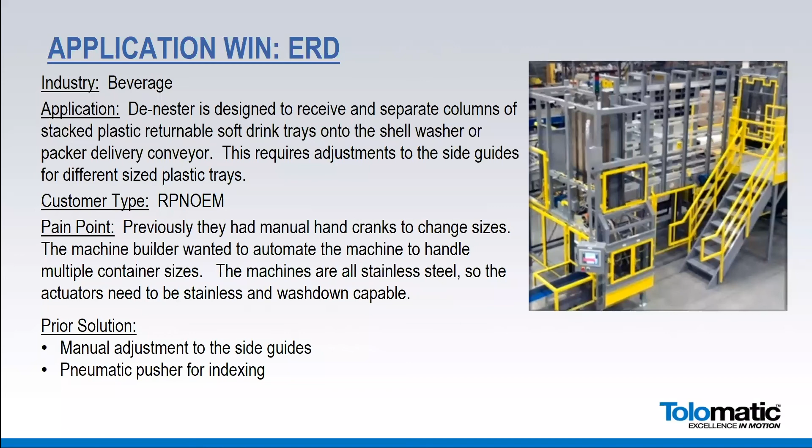There were 8 of these on the initial sale here. So we'd quoted the technology, we shipped the product. When we shipped the product with our ACS drive, they had some programming issues initially. So to help them out, we flew one of our electrical programming engineers down, got the programming right. And since then, we have gotten over $100,000 worth of orders from these guys.

But what I will say is these guys also make conveyors. So from a stainless steel ERD SS2 option, you can also use these actuators on kickoffs, conveyor kickoffs, and level 1, level 2 raising and lowering of conveyors. So we've done multiple applications for these guys, but this was a big win for us, and we continue to do business with them upwards of $100,000 a year.

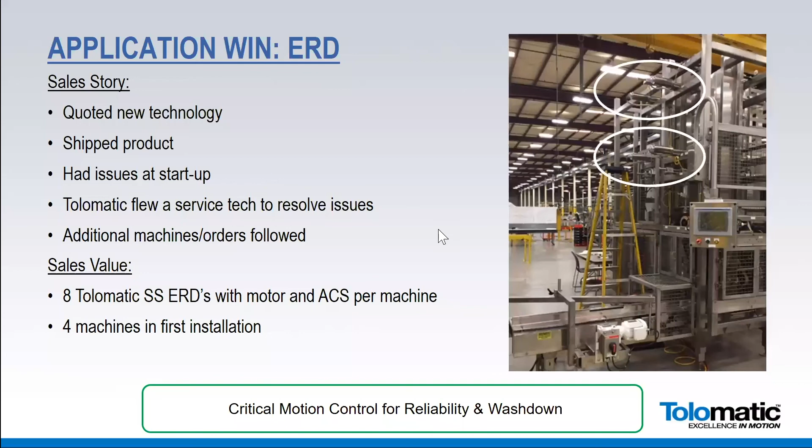So for this application, it's a simple application. As Andy mentioned, we make what we call our SRG, or Slide Rite gearbox. It's a right angle gearbox, been in production for a long time. We are probably the low cost supplier of such a gearbox, and it's used extensively in food and beverage. Fillers, denesters, as Mr. Staines just mentioned, and in this case, a field berry processing table.

All these are doing, I'll show you a picture on the next slide when we get there, is adjusting the height of the table because different workers need different heights.

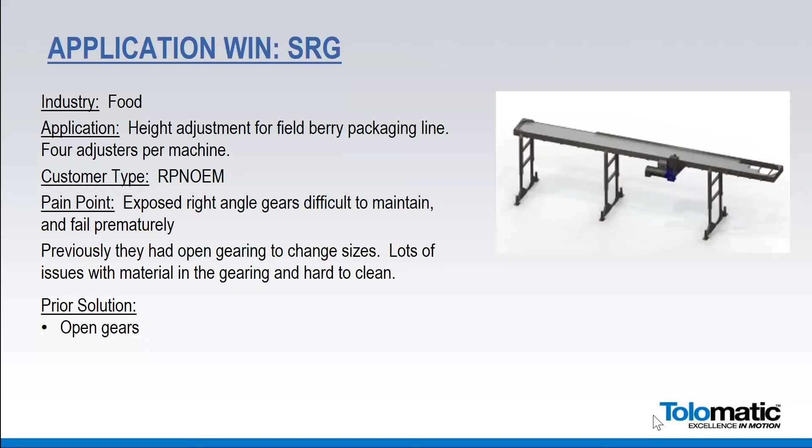Ergonomically, you want to have it in an optimal position. Most berries, like blueberries and everything, are hand-picked. So the berries get put on this line, then put in a big hopper and taken into the processing point. In the past, they just had exposed gearing, and these SRGs are way down at the bottom near the feet, dragged through the mud. We have a corrosion-resistant SRG, which is perfect for this.

Easy sale. So for you food and bev coverage customers, don't forget about the SRG. It's a really easy sell for these customers.

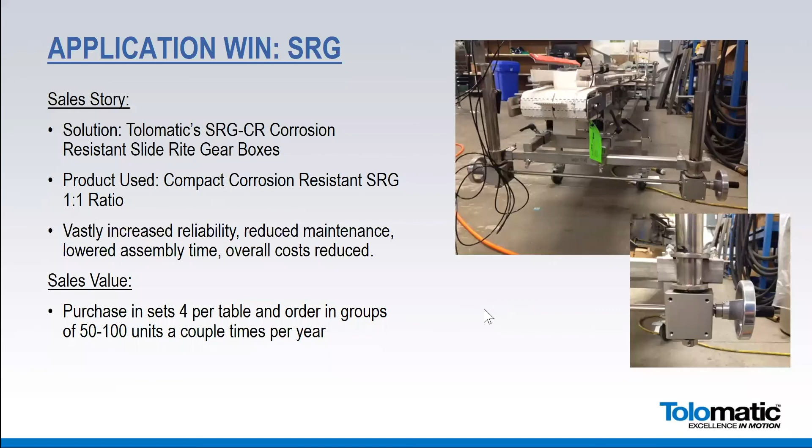For anybody not familiar with the food and beverage market, you have to be exact or meet the minimum requirements. So if a package is 8 ounces, it's got to have 8 ounces. It can have more, but no less.

With our solution, the stainless steel IMA, we were much more accurate, and we developed this product with this customer in a full partnership where we replaced the 2.5-inch air cylinder at 80 PSI, providing about 400 pounds of force and 30 to 40 cycles a minute. The actuators we provided have a max thrust capacity of up to 2,000 pounds and a speed of 19 inches per second, developed specifically with them to meet envelope and mounting requirements.

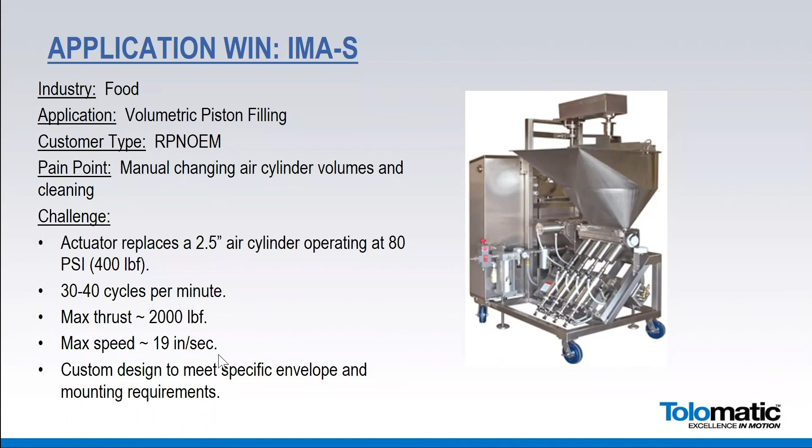As I mentioned, we were replacing pneumatic cylinders, and we were also being evaluated against Exlar for our electric actuators. Exlar did not have an aesthetically appealing and hygienic design like we were able to do. We started from a white sheet of paper with this customer and provided a custom design three years after our initial proposal. We got in with them, they found some beta sites, and tested the units on a couple machines, pie fillers and such, for almost a year, nine months.

We learned through that various sealing properties and designs. This customer really helped us because we're utilizing our roller screw technology, learning what we needed to provide for the market there, and getting into developing the IMA stainless steel actuator with internal anti-rotate and Rockwell automation feedback with our Hiperface DSL encoder. This product is a hygienic IP69K all stainless steel 316 design. Next slide.

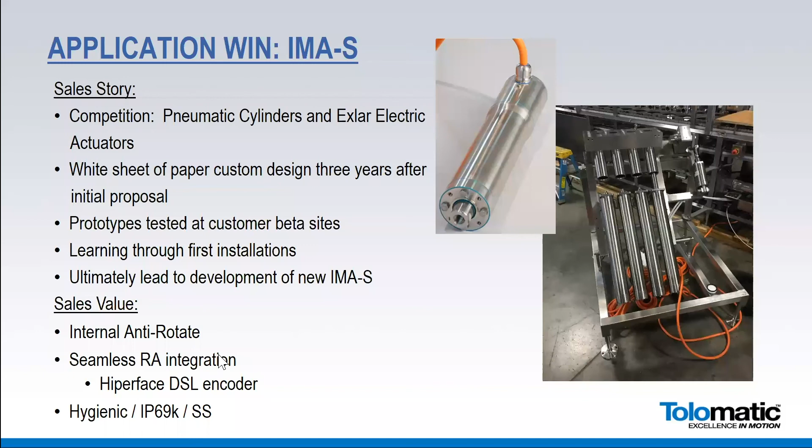Hello? Yep. Should be there, Dave. It's not advancing on my screen. There we go.

Okay, so this next application is meat and food processing, various markets and so forth. This is a true RPNOEM where they approached us. They were utilizing hydraulics and also had used Exlar, but the Exlar was not performing, and the hydraulics caused too much risk for them.

They needed a high force, high duty cycle actuator to fit in a very compact space, as you can see with the shroud around the actuator assemblies. Because this is not above the food product and is housed in an IP69K chamber, we can utilize the white paint design on the actuators. This is a high force and continuous stroke cycle application with anti-rotate requirements. Next slide.

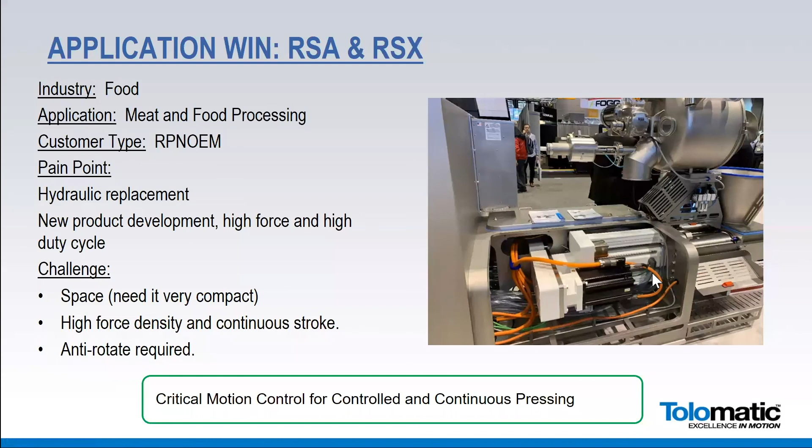It's not advancing. There we go. Okay.

We started discussions with this company in December 2017. As I mentioned, they were not very enthralled with Exlar and their responsiveness from a technical or partnership standpoint. So they actually helped us do a lab test, a detailed competitive analysis, particularly with the roller screw in these RSX actuators, calculating the power, wattage and heat generated with the screw and nut assembly in these high force, high speed applications. Six months after our initial discussion, we got a prototype purchase, then they got into a beta site test in November 2018, and started production in the first quarter of 2019. We've been doing business with them ever since.

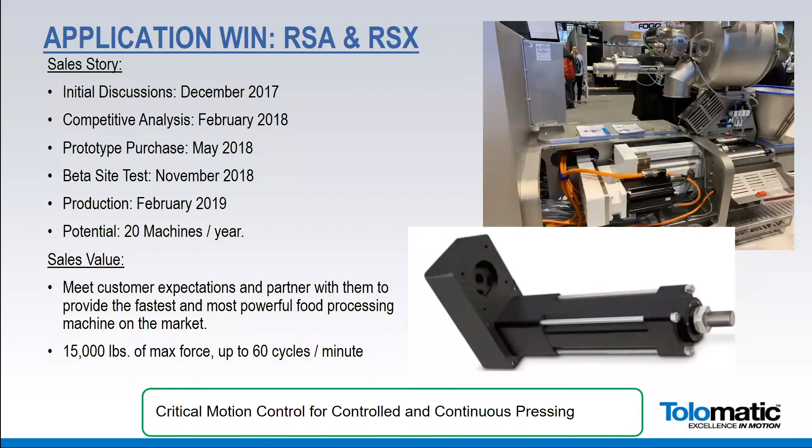They do about 20 machines a year of this design, and they've got several more designs. The key here is formulating that partnership - we met their expectations, worked with them on the full development of the machine, and helped them achieve their goals, providing the fastest and most powerful food processing machine on the market, doing up to 15,000 pounds of force at up to 60 cycles a minute.

The next one here was also a long sales cycle for us, where we had customers wanting to utilize or incorporate a walking beam, pulling sides of pork and beef through a chilling room as it needs to age and be checked for bacterial issues and so forth.

This was an OEM and an end user. They'd historically been using hydraulic products or actuators to move the sides of meat. The risk there is that if you blow a seal or fitting or crack a hose, you contaminate thousands of pounds of meat, which could be over $1 million in product. It gets very risky and expensive, and quarantining it, even with full food and beverage hydraulic fluid, vegetable oil and so forth, the USDA oftentimes just wants that meat discarded. The hydraulic operation under cold temperatures is highly fluctuating and can cause that risk as fittings expand and contract due to temperature variances.

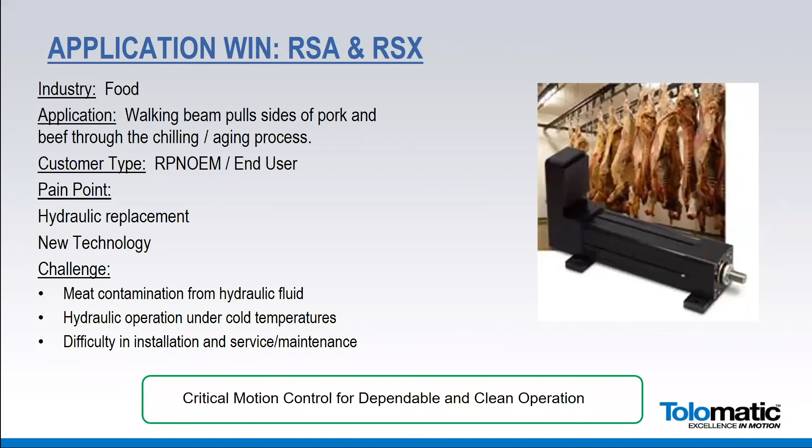So there was difficulty in installation, all being overhead, and maintenance and service practices on that.

This was a pretty long sales cycle - we started initial discussions with them back in 2013, and finally got a beta site test to run an RSA 50 for an entire year to verify that it would perform and work. Twice over that year they had some performance issues, but we were quick to respond and met their requirements. It was really more of a feedback and positional feedback issue - they were using a mechanical switch versus a digital switch, and we got them to change out to address that performance issue.

The benefits were that we eliminated the risk of contamination, provided high thrust capability up to 3,000 pounds of meat on a line, reduced their maintenance and operating costs, and made the product fit in their hydraulic footprint, while providing local and factory support. We formulated a solid partnership, and in this application the customer went with Kollmorgen motors - they bought 100 units at over a $250,000 order.

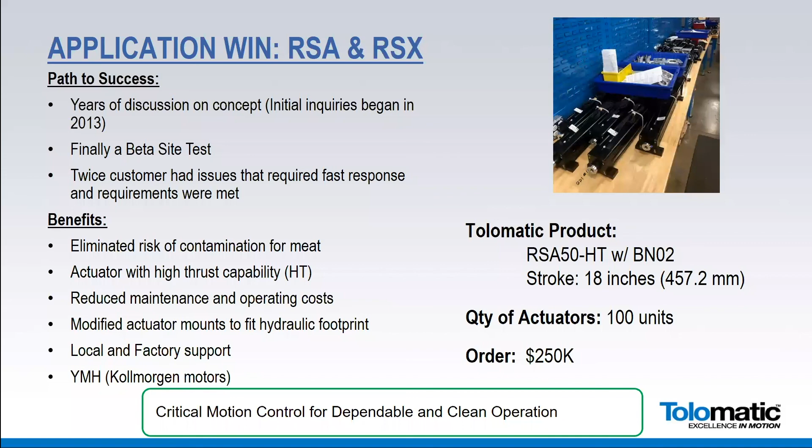This next one feeds off the other food processing application I did two back - that company makes logs of meat, and this company has a machine that slices them. This too is an OEM where we've formulated a solid partnership with them. They'd been using a pneumatic solution, but it was unable to provide continuous accuracy and repeatability. Our competition in the electric arena couldn't meet the hygienic design - that being XLR. So this stainless steel boxed electric actuator provides an open architecture for them, and we're utilizing our new stainless steel IMA 33. We've conducted lunch and learns to start the process with them.

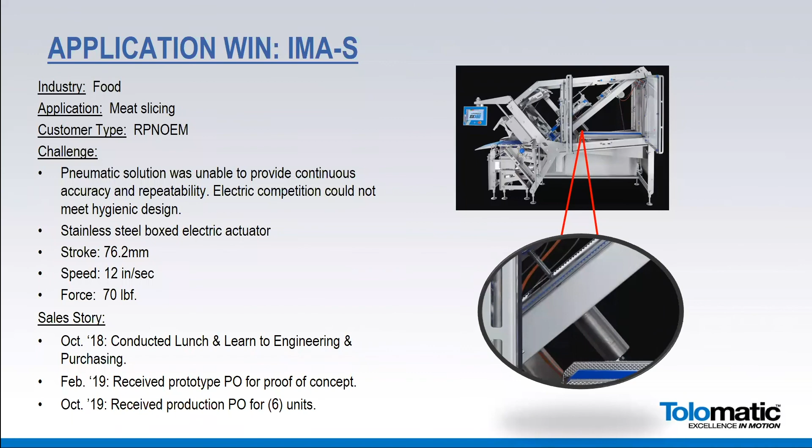This was one of the first customers of the full production release IMA stainless steel, where I had the privilege of selling the earlier ones way back on volumetric fillers. These products provide very high speeds and are very efficient, with all IP69K hygienic design in a compact package. This allows for open machine architecture for easy cleaning, and the partnership we've got with this customer has provided additional opportunities for us on new machine designs.

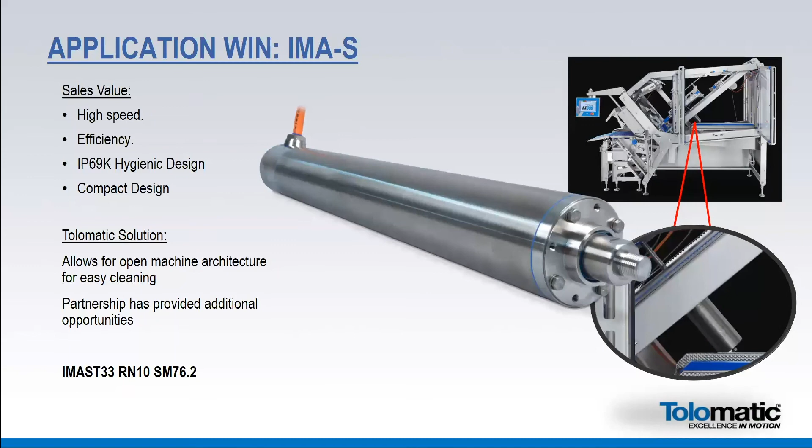Great, thanks a lot, Dave. Appreciate it. Keith Hogan, you've got three applications to share with us here. Thanks, Andy. Good morning everybody, and afternoon for those that apply. Yeah, so another food and beverage application here.

You know, most people know that we have to fill containers, but a lot of people don't know, at least I didn't know, that you have to dry them after they've gone through some washing machine. So this is an OEM. What they had was a manual system where they would adjust the nozzles, because all of these containers, bottles, cans, etc., come in on a belt.

And that belt is positioned according to the height of the bottle. And so in order to get a good drying, forced air on top of the cans or bottles, they have to have an accurate position so they can be up above the bottle or can.

And what they had was a manual system where they'd loosen up some bolts, slide it up and down, and then tighten it back down again. Well, that required them to open and close the machine doors, and then reset the system, et cetera. And they just couldn't get the throughput that they wanted.

They thought about pneumatics, but that's not an infinite positioning situation, so they'd only have a few positions. And they needed IP69K. So next slide, Andy.

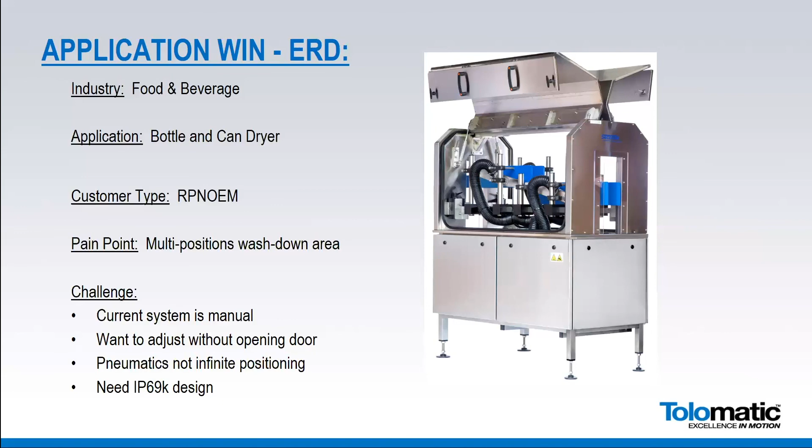So in drying these, they needed to height multiple positions, and part of the problem was that they had splashing of water in and out and corroding some of the fixturing that they had. So they needed an IP69K stainless steel solution. We provided them with an ERD15 with the SS2 can on the back.

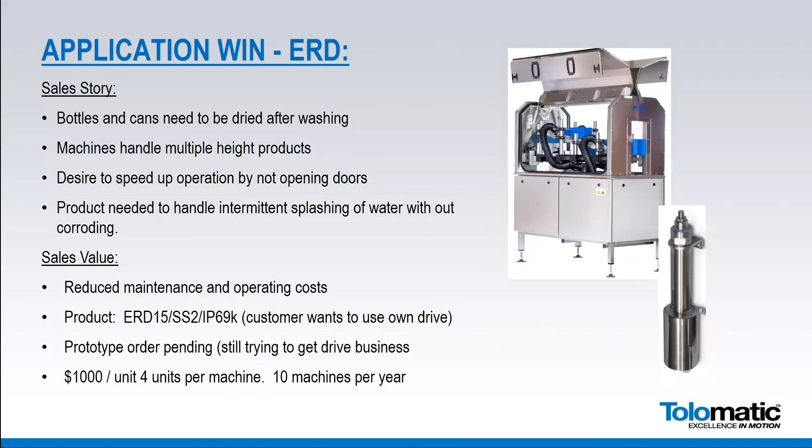Next slide, Andy. Okay, so this one's a little bit different. Food and beverage, we kind of went out on a limb and said, if you're going to have food and beverage, you have to be clean. So this dishwashing pod manufacturer, actually the pods for the dishwashing systems are relatively new.

It's a market that's growing quite rapidly. This customer was asked to make a machine that filled multiple pods at one time and then separated them after they were filled.

So the challenge with some of these machines is they sit very close to the floor. There's not a lot of space to really put actuators, and historically some of this stuff has been done with just a cylinder. So they needed to have some corrosion resistance, and they wanted to obviously automate the system so that it was a turnkey solution.

So how this came about was in 2017, we went out and tried to speak with this customer. We were working on a different application. They actually didn't understand some of the tolerances and stuff that we had for our light duty ERDs. We ended up making that right for them. The customer was happy with us, and so fast forward to 2019.

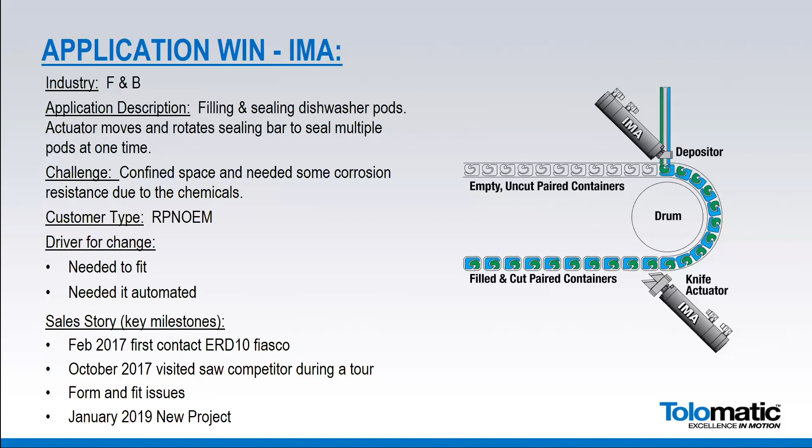Next slide, Andy. They had a new machine that they were developing for this pod machine, and because we had made the last application right and did them well, they came to us right away because they had been introduced to our IMA series. So what they had to do in this application, you see there's actually a belt, pretty wide belt of all these different pods.

And so this is a continuous feed operation. So as the belt was moving forward, the IMA was asked to match the speed of the belt as the depositor was filling each one of the pods, and then it would back up and it would do it again and back up and do it again.

So the continuous feed was important, and they were in a situation where they had to have some corrosion resistance due to the material that they were dispensing. So what they ended up asking for was a stainless steel rod and fasteners. They didn't need the white coating.

It was going to take an extra few weeks for us to provide the white coating, so we made it a special and added stainless steel fasteners and stainless steel rod, as well as in this one they wanted a stainless steel clevis on the end of the rod. They were really interested in the IMA 22 simply because it was the right force and size, etc.

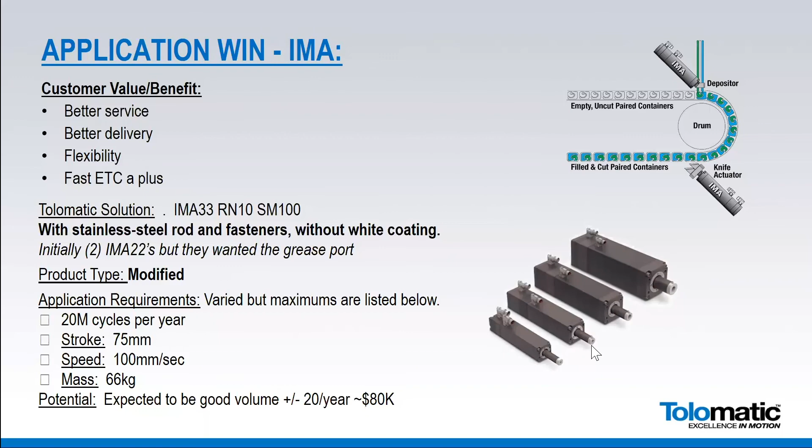Okay, this is an interesting application. It's a company that makes hard candy, like the Werther's candy that's hard and relatively small, kind of a candy for Halloween. Now you've got a repeat part number OEM customer who had historically been using hydraulic. We were the second guys to come into play. They had made an electric actuator driven machine, but ironically the competitor sized it incorrectly. It wasn't performing the way they expected, so we got the chance at the business.

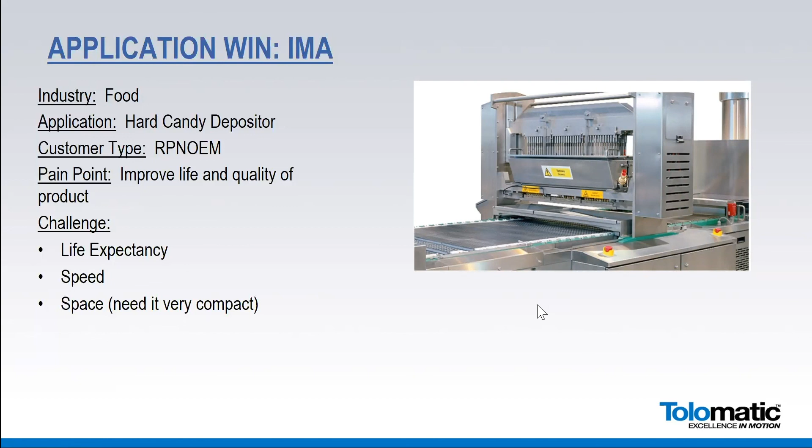So, next slide please. When we jumped into the application, in those towers they had already installed an electric actuator. We took a look at it, and some of their issue was the fact that they had used a rigid side mount with an interesting clamp mechanism to connect to the depositor, and that was creating some severe side load on the actuators.

So we worked with them. The reason their attachment on the end of the rod was so complex was the fact that they had to incorporate an anti-rotate in their application so they knew exactly where the position was of those heads. We took a look at it and said, you know what, we can make a built-in anti-rotate on this because it's not required to be washed down, since it's being shielded - this is not a washdown application.

So we went to work, created an IMA with a hexagon rod, and having a hexagon rod with a bushing on the end that fit that rod, we actually have an internal anti-rotate version of that IMA - it was the IMA 44. Behind each one of those tower shields is 2 IMAs, so there's 4 IMAs in each one of those towers, or in each one of those depositing heads.

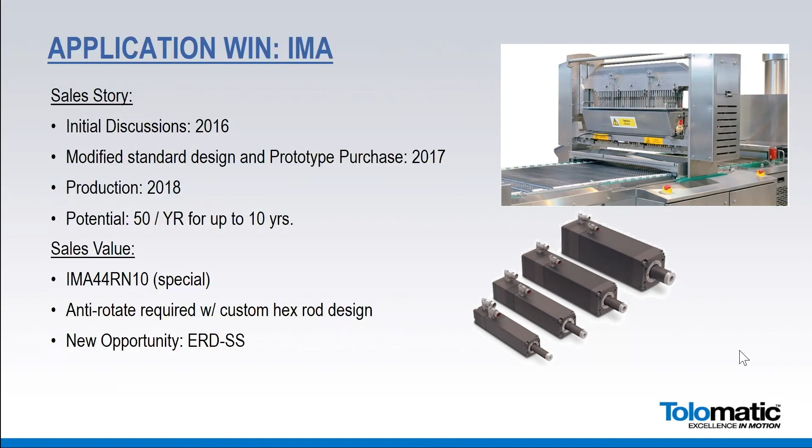Perfect. Mr. Farley, Adam. Hi, thanks Andy. Good morning everybody.

Yeah, this is a volumetric filling application. This is a customer that typically had been doing these machines pneumatically for years and years. So to start the conversation, moving from pneumatic to electric, I call it the leap of faith - meaning you're all in, the customer's going to be all in on this, embracing controls, PLC controls, servo actuation, all that good stuff when going to electric.

So the issues with this customer were pneumatic position and accuracy. There's always the chance of air leaks, so you could under or overfill, and that's a big deal in the volumetric filling world - I think Dave Schmidt mentioned that earlier in a slide. And then the high cost of running air just at a plant, having compressors running in the background.

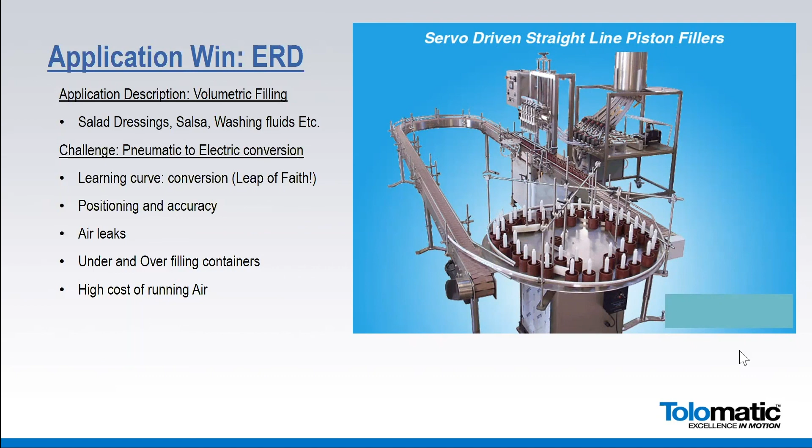All right, next slide Andy. So discussion started early 2016. Again, this customer makes multi-port systems, so we started off making an 8-port filler, and then it just took off from there. As you can tell by the photo, real nice clean setup with our ERD 15s, all SS2, servo-driven, all our servo-driven actuators with our ACS drive.

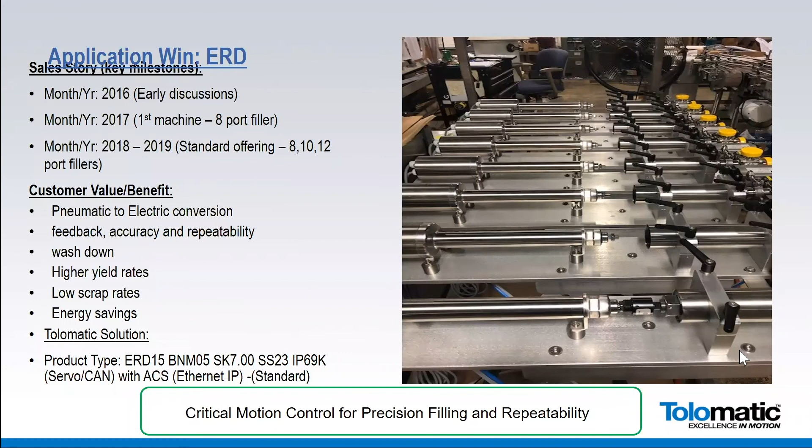Customer's benefit for this - again, feedback, accuracy, repeatability, he gets all that. He also gets the washdown feature of the actuator in the full assembly. Because of this, he gets higher yield rates, low scrap rates, and then energy savings based on going electric. Again, this is a standard solution from us, just an ERD 15, as you can tell by the part string there.

All right, next slide. This is more of a material handling application in food and beverage. It's a good customer. The challenge for this guy is large bakery drying ovens, and these racks are fairly large.

They're fairly heavy, and it's been a manual operation for years at the plant. They would constantly have to pull an operator off a line to push and move these racks along the drying lines before they go into the chopping lines. This is for a crouton manufacturer. So again, getting back to the heavy loads, the heavy racks, as I mentioned, a staggered operation.

So the racks would come and go. This drying area, if you look down here, this thing's probably 60 feet long. These large drying areas, as a manual operation, definitely caused ergonomic issues. You had some people trying to push some of the larger racks. Yeah, they are guided, but they can get some jamming. The racks can jam in some instances, so they were having some throughput issues.

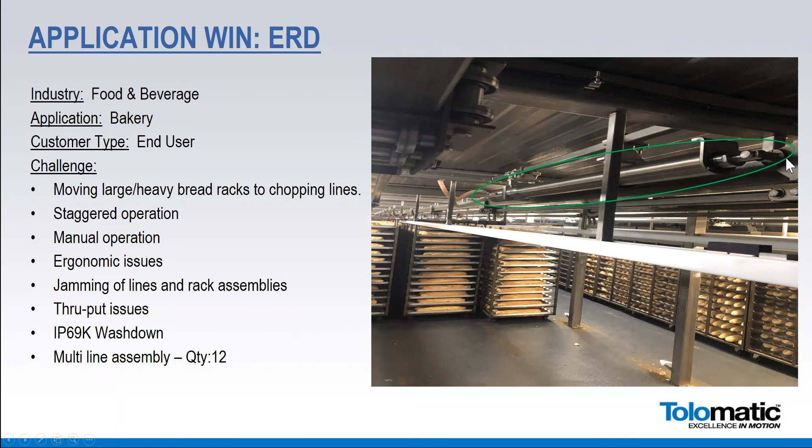It is a washdown plant, so everything there needs to be washed down, and it's a multi-line facility. If you look up on the right-hand side, we have a large ERD 30 in there, and that drives that whole rack into the assembly. Next slide.

So again, just a closer picture of what the unit looks like. Nice, again, ERD 30, standard IP 69K. We went with the roller screw. This is a 24/7 plant, so they wanted reliability and long life. That's why we went with the roller screw.

We did a lot of engineering support for this operation, just making sure the ERD was sized properly. The distributor supplied a full value-add on this, supplying the washdown motor from Kollmorgen, as well as supplying the complete control panel, startup, software, all the assistance from the distributor end on that side.

The win-win is, again, consistent output. They don't have to pull an operator out of another part of the manufacturing line to keep these racks moving, and they haven't had any ergonomic concerns at all since these have been in place. That's it. Thanks, everyone.

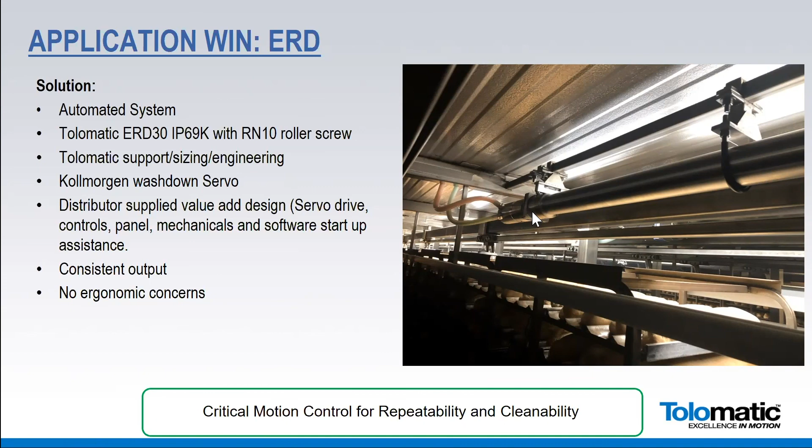This one is interesting, tying into our brand new product just out in the last 6 months or so, this IMA stainless steel. This customer had been using electric actuators in the past, was very excited about the solution we were creating and that we had in our development process. So they waited for a while. They talked to us about the cheese slicing they wanted to do, but they really wanted it to be easy to clean. They wanted integration that was simple with their control system, and they wanted to make sure it was washed down and IP69K.

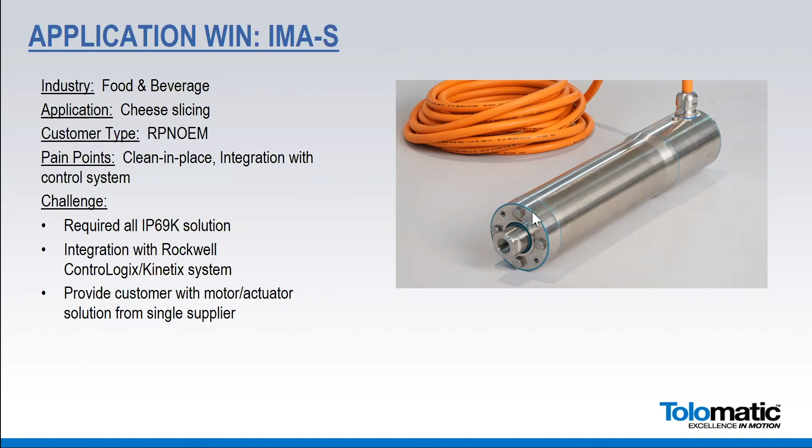So we worked with them and were able to give them a single cable connection, so it would tie right into their Rockwell ControlLogix system. Rockwell's the PLC of choice for, I don't know, about 70% of the food and beverage industry in North America anyways, I think. So we made that part of the standard design for our new product. We provided the customer with that motor/actuator solution, all from one supplier.

So you can see here, all stainless steel machine. We started talking to them about an ERD with a stainless steel motor mounted on top of that. The customer was a little concerned, as some are, about the sealing between that motor and the ERD itself. So they decided to defer and wait a while until we had this all-in-one solution available. We did a lot of work with their engineering team back and forth, our application engineering group, a number of drawings sent back and forth to ensure we had the fit correctly.

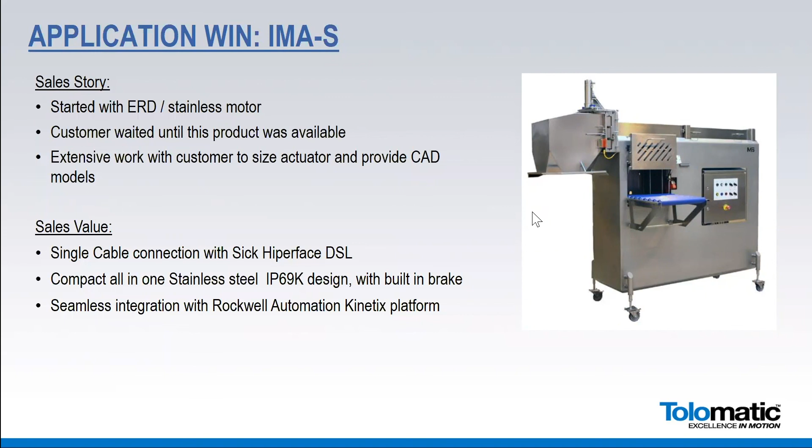But at the end of the day, the customer bought a couple of units, installed them, and everything's been going great. They're very happy with the new design and the upgraded feature set they get with this new integrated stainless steel IMA.

We'll talk about replacing those, and then they pneumatically would get 4 jugs on a plate, drop the plate down, unload those 4 jugs into the box as the box moves on to then be closed up and shipped out. So those were the 2 applications.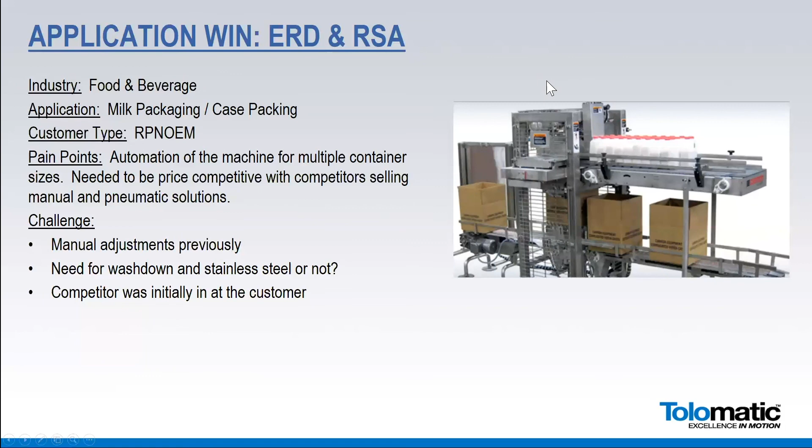Challenges - we really wrestled with this idea, is it a washdown application or not? They were using a competitor at that point, so we worked with them. The first thing we did was put some ERDs on their lane adjustments. We took off the manual piece and put an ERD on. Now with a push of a button, they could handle different size milk cartons coming down instead of having an operator go out and adjust those, trying to find a marker, a Sharpie, to mark on the side of the metal so they knew where to put them.

That went very well. Then we kept talking about displacing the competition on the move to drop the carton, the milk, down into the box. We led with our ERD saying, hey, it's an all stainless steel machine, you're in food and beverage, don't you want washdown? The customer just couldn't figure out how to make their whole system competitive with whatever else was out in the marketplace, their competition, with a stainless steel actuator. So we said, hey, you are not in a washdown environment. Everything's been packaged up here, it's coming down the line. The competition you're using is not a washdown piece of equipment. We have a number of other actuator options.

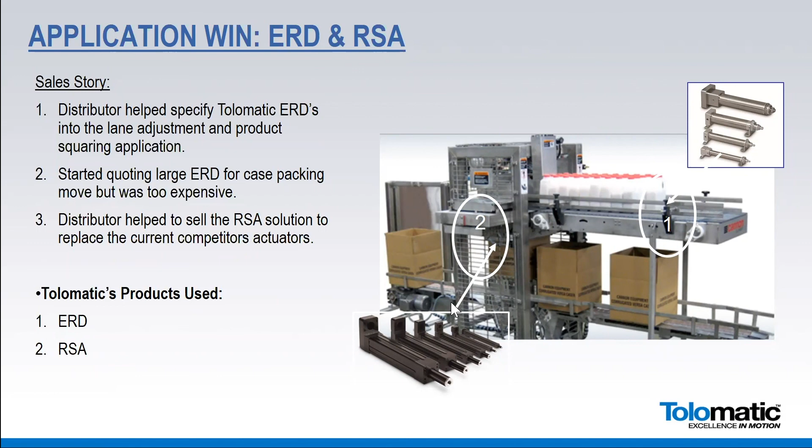So we looked at both the standard IMA as well as our RSA, and ultimately they went with an RSA solution. The RSA is mounted on top, it indexes, drops down, drops the milk down into the box, retracts back up, and sets up for the next set as they come along. The solution's been working great, no issues with integration, and the customer's been working with us for 2 or 3 years now with that solution.

What they're doing is they have a sorting table up top. All the food comes down the line, gets diverted into lanes basically, and now we're indexing down. One gets placed on top, it indexes down, the second one lands on top, indexes down, third, fourth, and then drops all the way down onto the conveyor. Now we're in a stack, and that stack can be placed into packaging.

So it's really just taking out a lot of the hand touching. Usually you'd have an operator standing above it, moving things around, stacking them up. You'd have concerns about hair, and in this COVID environment, about breathing around the product, hands and gloves touching everything. So it's a kind of touch-free way, but you need a fairly accurate indexing application.

They had done this pneumatically and it had been successful, but over time they saw that using electric, they could actually ensure a better stacking solution for their customers. So they needed to be able to clean it in place, and they needed to integrate it with their control package. So they started using our ICR product - this was 5 to 10 years ago, and they liked that solution.

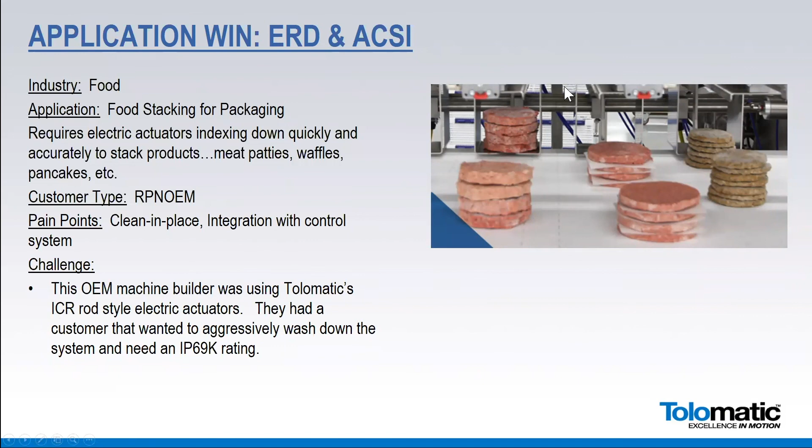It worked well, however, there was a lot of bagging of the entire unit itself that was required, and I can show you a package here. None of the entire actuator was really designed as a hygienic type of actuator. So they would bag the motors, and they would sort of live with the other part of the actuator sticking down here, despite the fact that it was aluminum and not stainless. So they really wanted to replace some of their pneumatics with electric. We did that with the ICR.

Then they decided it'd be better to move towards an ERD solution with stainless, so we helped them spec out the ERD. They put our ACSI motors on top, and the customer bags the motor when they do the washdown, but everything else can be completely clean. All the motors are along the top here. We're able to easily integrate with their Rockwell control architecture that they had standardized on, and we also worked with them a little bit on a custom MXP application for their pneumatic application.

So it's been a really good customer for us. We've had a long relationship with them, helping to make sure everyone's getting their Eggo waffles for breakfast.